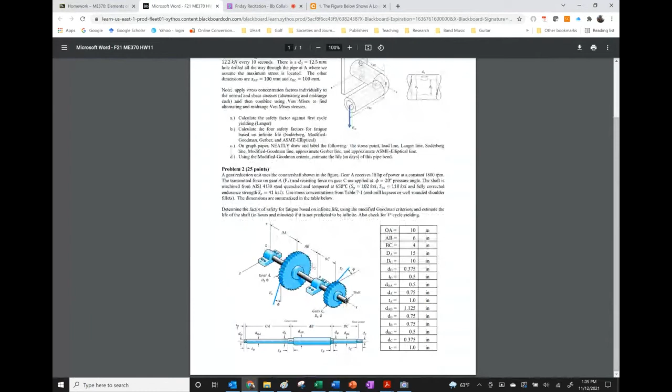Okay, so what is the homework? Is there anything specific about the homework problems? No, I think it's all just making sense. Just doing more is helpful. Okay, so we had a problem like this and a problem like this, so we could do examples like that if you'd like.

I'm going to talk about more things about the project in the next class, so I could try to invent a problem or problems similar to the homework if you'd like. Yeah, sure. Okay, so let's try that.

All right, we got some weird loaded thing here, and I tried to pick out one of the stress concentrations we haven't used yet. One of the issues we'll have when inventing a problem is trying to get it in the right zone where we'll be able to predict failure. But we'll just go ahead and pick out numbers.

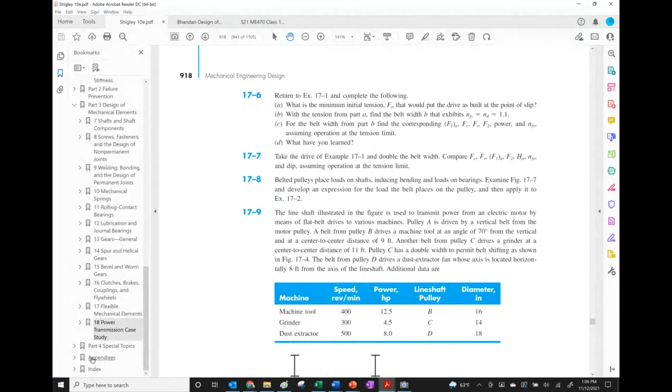So I think I have Shigley open right here. Oh, look at that, it did. And we'll start by going to some stress concentration things and work backwards maybe from there.

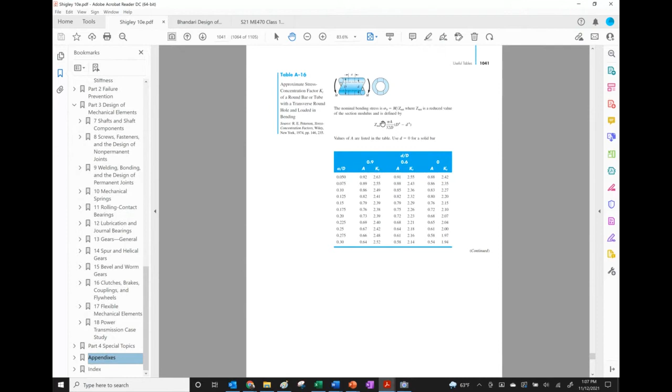So, yeah, this is for the homework problem. These are the stress concentration things that you would use, right? They're a little weird, so you have to kind of read through and see that they do this. They're weird compared to some of the other ones we've had here. But I don't think we've done where we drilled a hole through something, right? Have we used these before?

No, not through shafts. Okay, so let's do a problem where we do something with these. So that'll be our invented problem.

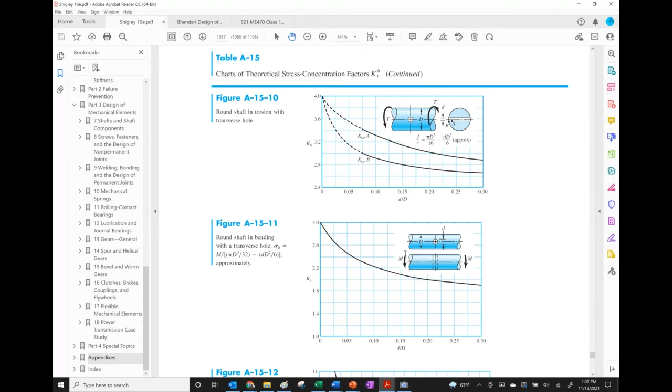So let me think. It's dangerous stuff, thinking. And I'll put this over to the side for the time being, and get to my camera and try to invent a problem.

All right, so just to keep it straightforward here, I think I actually had this as a homework once, or something like it. So maybe I should pick out an old homework problem here. I could do that, and then I would know I would get the right answer.

So I have crazy methods of saving things. I have homework summaries from other years. So this is homework 11, so I can kind of see what I've done in the past to try to keep track of them.

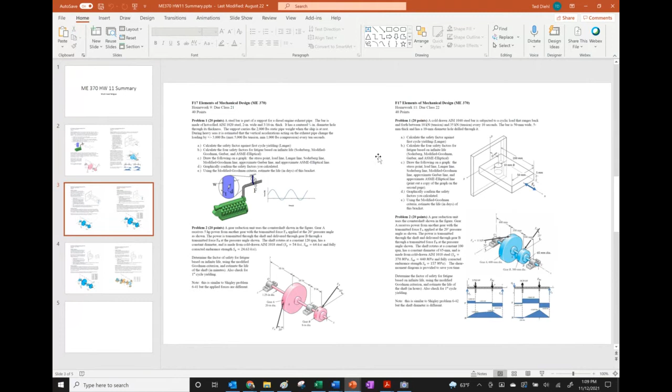So let's see, here's an old homework, here's from fall of 17. Oh, there were two separate ones. That's interesting, wonder why. No, there's homework 9 and then homework 11. Huh, I guess they're kind of similar. I don't know. Here you go.

From homework spring of 2019. So let's zoom in on that one.

So we have cold drawn 1045 steel, and the loads vary from 300 pounds up to 75 pounds down, right? And we have the diameter of this thing is 1 inch. I'm writing all this down as I talk about it, that's why I'm doing it here. Oh, and this happens every 10 seconds.

I need to write that word, every 10 seconds. And let's see, other parameters we're going to want to know here. Did I give the dimensions of this? Okay, yeah, okay, so 1 inch with a 0.25 inch hole drilled in it, and it's 6 inches long. Well, 6 inches to the point where it matters, right there. And that little hole has a diameter of 0.25 inch diameter.

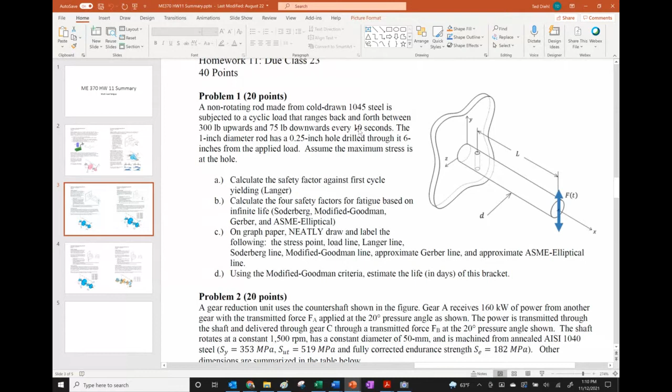Okay, and we want to find first cycle safety factor, and then the 4 safety factors, and then try to do all the other stuff. So this is pretty similar to problems we've done before.

Let me see, I said spring of 19, so I can peek at my solution. That's fair, right? I don't have to demonstrate my ability to think on the fly here all the time. You already did it, I'd say that's fair. There you go, all right, good.

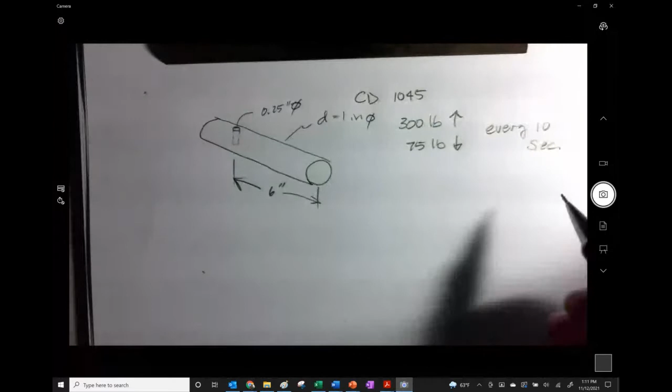So, first thing I probably want to do is figure out what the stresses are going to be. Yeah, I'm trying to figure out what the hell I just did here. That's a little weird.

All right, so I'll bring my stress concentration chart over here and look. You'll see that for the torsion - let's close this down so it makes it bigger.

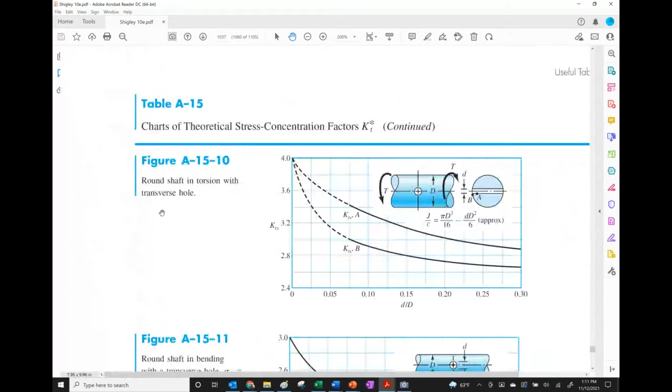For the torsion, they give us this J over C thing, and they give us two lines - one for A and one for B. If you look close up here, you can see B is just to the outside and A is apparently where this is going to be the maximum. But we really care about B because we're trying to find the worst case scenario - that's where the crack is going to initiate, right?

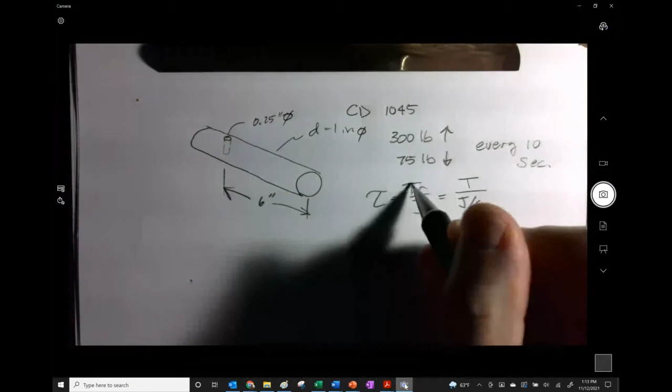So we're going to use the bottom one here of B, and that's dependent on just d over D, that's the only ratio that matters. We also need this J over C kind of idea. They don't quite explain that, but I don't know why they didn't write J over R instead, because that would make more sense - it's sort of the equivalent of TR over J. So instead we're just going to go T over J over C. The J over C is the thing we're going to get from that equation they pasted up here. So I'll write that J over C down as pi d cubed over 16 minus little d times d squared over 6.

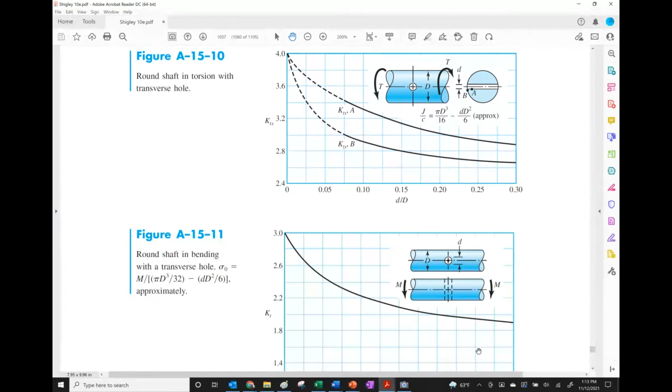Similarly, while we're here, we note that they give us a formula for the nominal stress for the bending. That's going to be sigma zero m over this large thing that is very similar to the one we just did for the torque, where it's pi capital D cubed over 32 minus little d times d squared over 6. So those are the first things I'm going to take care of - figure out this geometry.

So let's see, I'll do the bottom. Real quick, I'm looking at the figure A15-11.

And the moment goes with the direction of the slot. Is there another case for if it's perpendicular to the slot? It's a good question, but the thing is, that would put the hole on the neutral axis, so it wouldn't matter. Okay, gotcha - right, because there would be no stress if it was going the other way. It's a good question though, I thought the same thing, and then had to backtrack and go, oh yeah, that wouldn't matter because there's no stress on the neutral axis.

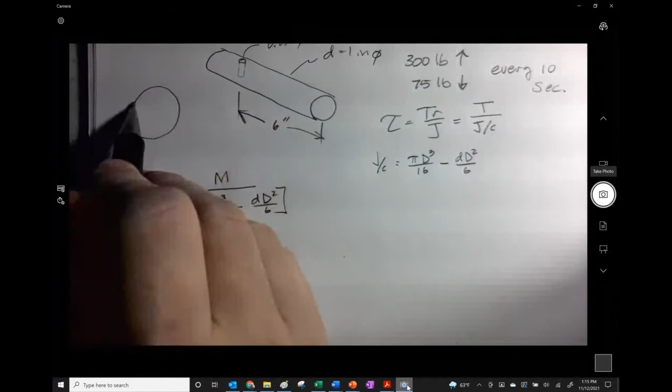Okay, so even if the little d is somewhat sizable, it still shouldn't matter? Well, it definitely would cause a stress-rising thing there, but I think mostly what we'd find is that the moment of inertia would just be reduced, right? The cross section would instead look like this right here, and that probably is what's going to cause the stress. There could be a stress riser right there, but the most amount of stress is most likely going to be right up to there. I don't know, Peterson probably has something like that in there - he really did a thorough job of coming up with just about every conceivable scenario for stress risers, and we're just getting a sampler of that.

Okay, thank you, no problem, thanks for asking. D cubed over 32 minus d D squared over 6, so that's just going to be pi, and the big D is 1, and the little d is 0.25 - that's right there, right? And 1 squared over 6. And we get 0.05651, and these are inches cubed.

Did I put a torsion on this thing? I can't remember, I didn't look at my original problem. No, it didn't - okay, so I didn't actually need all that. I don't know why I put that on there, never mind. I should have put some kind of torque onto this - that would make it a more interesting problem. But for the time being we're just going to have one fluctuating thing.

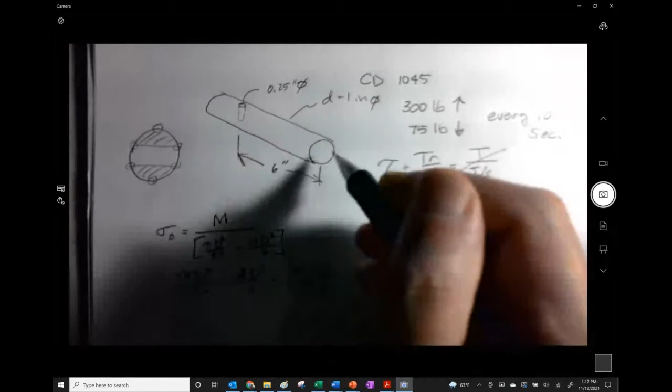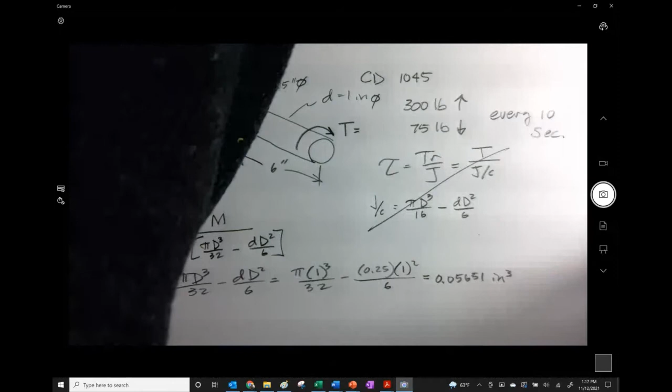Our homework problem would have a combination of stresses being placed on there - maybe I will do that here. I'm going to go ahead and do that, calling an audible. Let's put a constant torque on here. Let's see how much I could probably get away with on here. Boom, boom, boom, yeah I think we were okay. So I don't know, I'm going to arbitrarily pick - I'm going to go with 1,000 inch-pounds. I don't know what that'll do, so let me actually calculate this stuff.

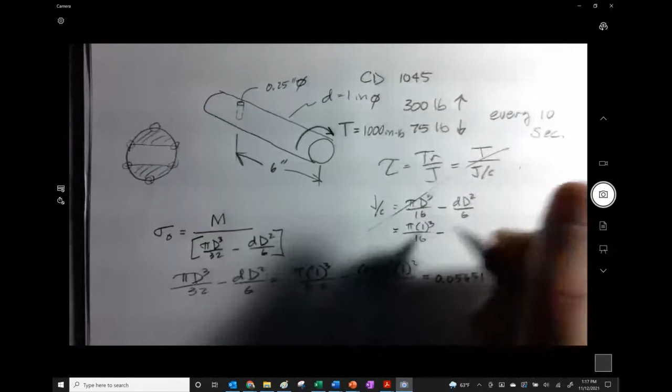I'm backing up and I got pi 1 cubed over 16 minus 0.25, and all of this looks pretty much the same right here, except for the 32 versus the 16, and 1 squared over 6. So let's see, we got ourselves - you can't even see it, right? Pi, oh no, pi divided by 16, because that's 1. That's good, and then just 0.25 divided by 6, and subtract. And so I get like 0.1547, right? Yeah, it shouldn't be too much - yeah, they're close to being one after the other.

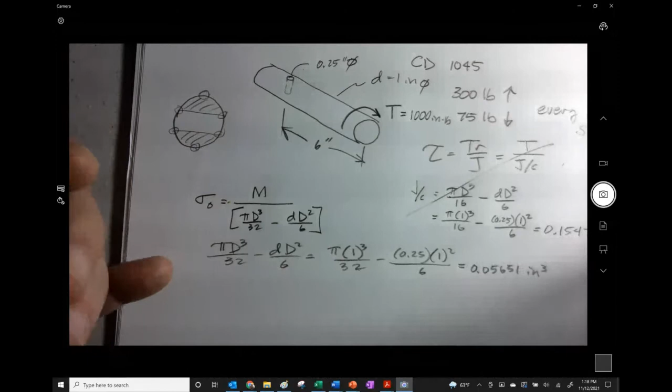Okay, so for my torsion I am going to get that torque of 1,000, right? It's not going to be a lot, is it? Well, okay, 0.1547.

All right, so it's not a lot, but 6.465 KSI. Now for this one, this is going to be steady, right? So it's nominal, and this is constant.

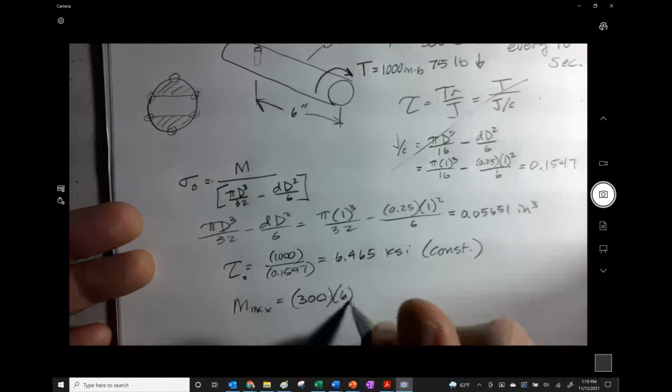My bending, on the other hand, is going to change, so it's going to alter. It's going to have a max bending equal to 300 times the 6, so we get 1,800 inch-pounds. And that's when it goes upward, meaning you're going to have compression up here, but tension on the bottom.

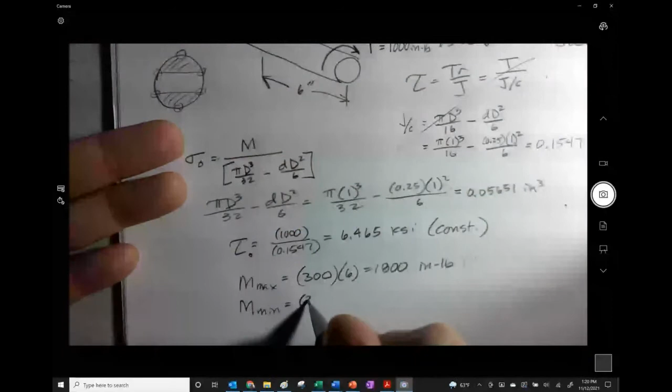For a given spot, we'd have tension on the top and compression on the bottom. But let's zoom in onto the bottom instead, because otherwise our minimum would be negative. So we're going to say this is the moment that causes tension. And then with 300 times our 6, that's going to give us 450 inch-pounds.

Something we should maybe do - I could turn the moments into a mid-range and an alternating, but I'm going to do it with the stress instead.

So I'm going to go with my nominal max, and it's going to be 1800 divided by my 0.05651, and I end up getting 31.85 KSI, and that's going to be in tension.

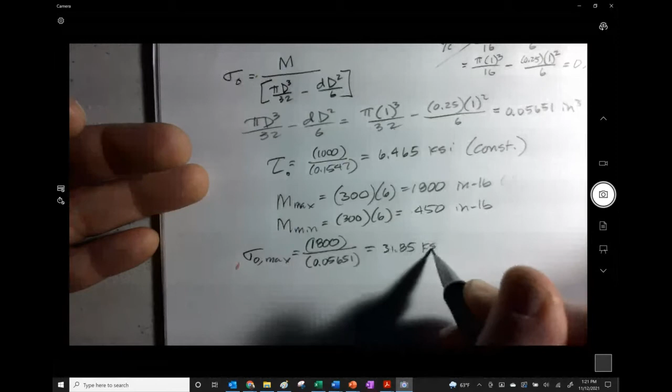And then I'll go with my min, so I'm going to get 450 divided by 0.05651, and I'm going to make that the compression one. So that's 7.963 KSI compression.

I can just move the camera, I don't have to move that. Okay, let's see, so my mid-range nominal is going to be this plus that over 2. But that's 7, that's negative. So I end up with 11.95 KSI.

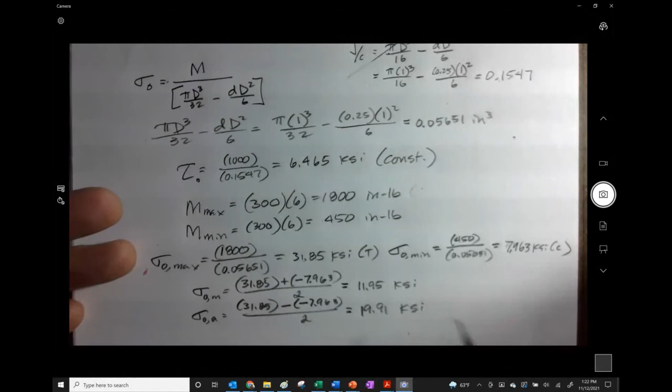And then I could have the same thing for my alternating: 31.85 minus 7.963 divided by 2. So I get an alternating of 19.91 KSI.

So this right here is going to combine with that right there when we go to get my overall mid-range and alternating, right? So the mid-range, I do the mid-range first. We're going to have mid-range here, going to be - I can do this in my head, I swear I can - KF mid-range here...

Squared plus 3 times K... Oh, I haven't looked these up yet, the KF stress concentrations. I meant to do that. All right, tau mid-range squared, square root.

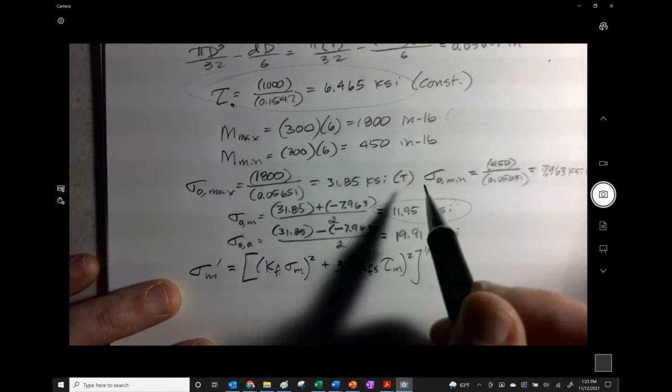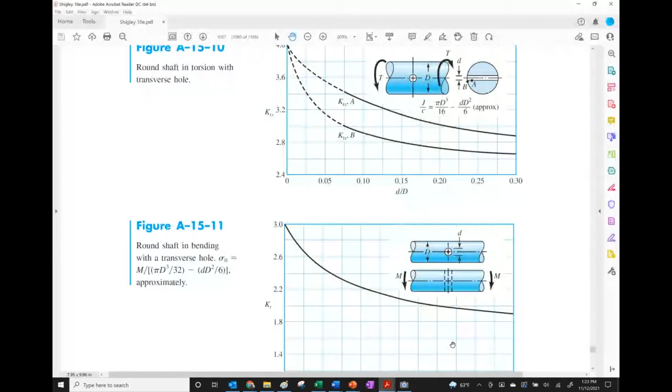Yeah, so let me look up my KFs, or KTs, I guess I'll start out with. And my mouse is hidden - there it goes, there we go. So, oh, I need my d over D. Well that's pretty easy because it's 0.25 divided by 1, so ta-da, not difficult to do.

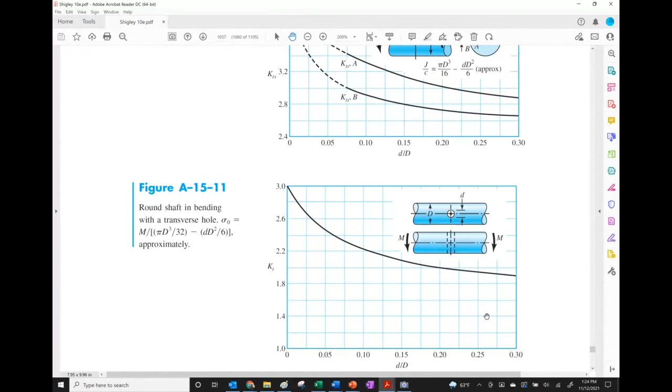And what I said this was before - well, now I've got to do this one first. All right, so that was just 0.25, and I said that was 1.93, which seems very ambitious right there. So I guess I'm going to write it underneath here. KT is approximately 1.93. While I'm here, and I haven't done this before because I just added this aspect onto the problem to try to make it more applicable to our homework.

We want 0.25. I'm going to say, okay, so we have 2.6 right here, so I'm going to say that's 2.7. It's actually probably just a little less than 2.7, I think, but 2.7 is good enough, right? So I'm going to go with my KTS approximately - did I just say 2.7? My attention span is so short sometimes. Yeah, 2.7. So that's going to actually increase this thing quite a bit.

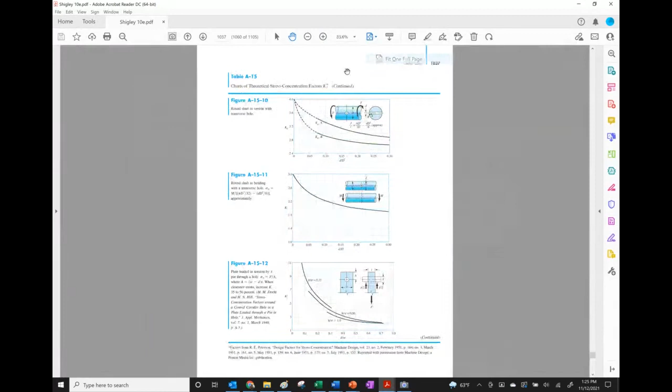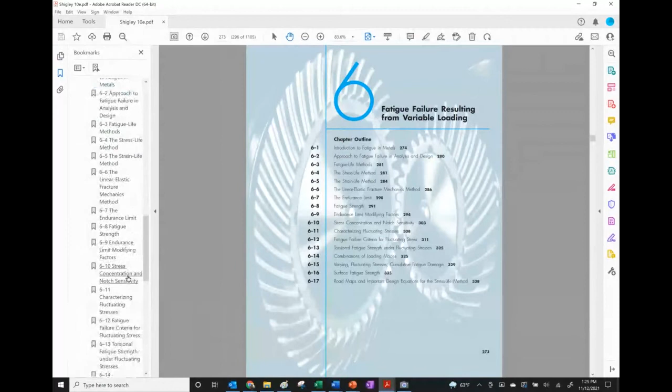And now I also need to go and find my Qs for my notch sensitivity. So let's see here, I'll open that up over here. Yeah, and we are in chapter 6, notch sensitivity. So okay, so our diameter of the notch is 0.25, so the radius is 0.125. So that's what we're going to use here.

We need some material properties though, don't we? We were told it was 1045 cold drawn. You could trust me that if I give you the numbers, they're the right ones - we don't necessarily have to flip to the book. So the yield strength for that is 77 KSI, and the ultimate strength is 91 KSI.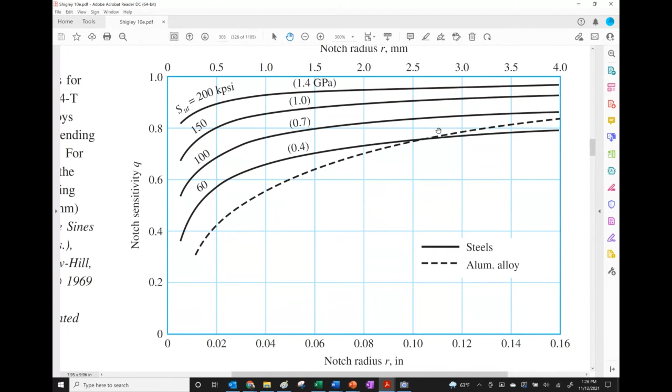But I'm not going to for this next one. We'll do this similar thing. And here's our 100 KSI. Yeah, that's actually pretty close to 0.9. No, I guess I'm going to go actually 0.85. Right, I'll go 0.85 on that one. It wasn't all that much different.

So I can get a KF of 1 plus 0.834 times our 1.93 minus 1 here, and 1.93 minus 1 times, I already have this one written out, so I don't know why I'm calculating. It's the other one I have to calculate. This one comes out to 1.777.

This is the one I have to calculate because I hadn't done it before. 1 plus 0.85 times our 2.7 minus 1. I don't know, too many things. Okay. 0.85 and 1.7 times that, and then add 1 to it. We get 2.445. All right.

So, coming back, okay, so that was a thought cloud because it was a diversion. We had to go back up to there. For our mid-range, we're going to get the KF of 1.777 times the mid-range, this guy, 11.95, and that gets inside the square, plus 3, and we go 2.445 times, where'd you go, this guy up here, right? So this was a nominal because of the twist I arbitrarily put onto the thing.

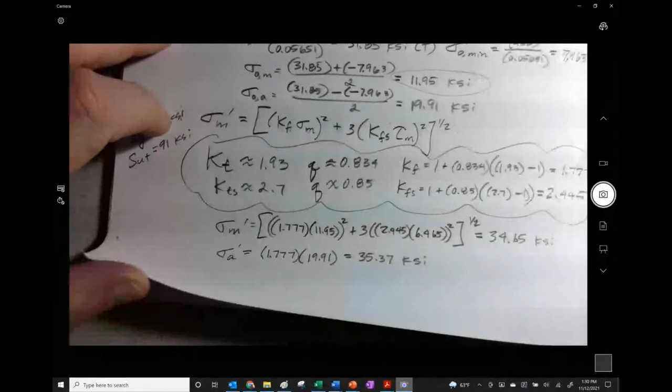So we have 1.777 times our 19.91, and we're left with 35.37 KSI. So here's our mid-range and our alternating, and we can start doing some stuff with the fatigue part of it now.

With this, we need to get the endurance strength. I'm going to fly through that part because we've already had a bit of practice doing it. It's just being careful that we pick out the right factors and coefficients. And I'm using the values from the 10th edition because I haven't updated them. So we find SE by taking KA, KB, KC, KD, KE, and KF and SE prime. And as I had mentioned, the ultimate was 91 KSI.

Why is... it doesn't want to come on, focus. There you go. Here's something to focus on. There you go. All right.

Okay, so here's just what the factors ended up being. 0.817 for the surface condition factor, which I believe I chose because it was cold drawn. I think that's the thing. A lot of times that's my go-to, the cold drawn and machined, because a lot of the stuff that we deal with is machined. So yeah, it's good. I don't know what the ground one is. I'd like to find out, but maybe someday I'll find out.

And then for this, it's not rotating and it's round. So I did get a DE for this, right? Where you take 0.37 and multiply it by the actual diameter, which is a weird thing. I just did something weird. I don't know. Anyway, and my solution, I'm looking at my old solution, which is a typed out, written out Word document solution, and I made a mistake there. I never caught it, but that's okay.

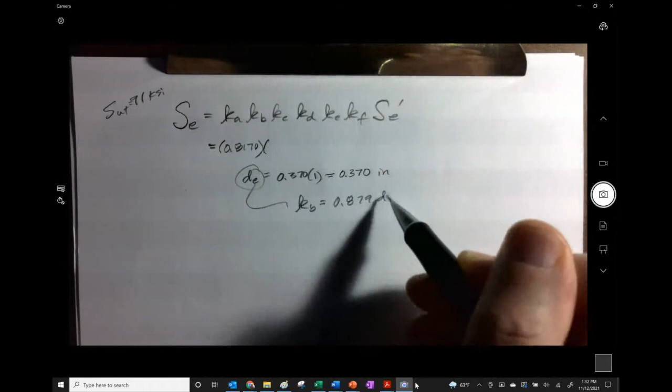So we use that and we stick it back into that KB thing where I think it's 0.879 times the diameter raised to the negative 0.107, right? So we use this diameter inside here and we end up getting 0.9777. I seem to have seen that one before, actually. I think it's my combination of stuff. I think it's with a 1-inch shaft diameter.

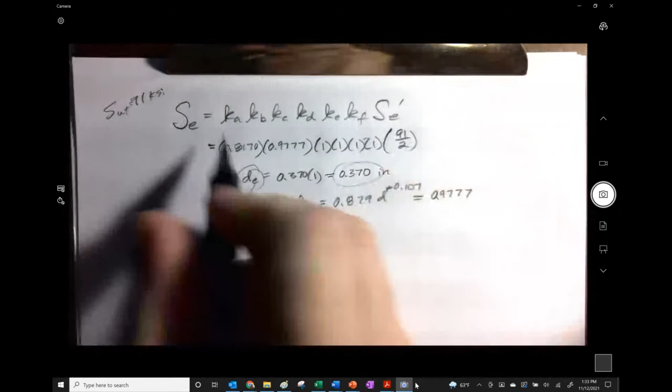That's what, but yeah, anyway, the C. This is a bending thing. It does have torsion in there, but it doesn't matter. So that's going to be 1 for there, and then the rest are 1s. Put another 1 in there for good measure. And then we have 91 divided by 2, right? That's the SE prime. And we're left with 36.34. I said 36 and I wrote 63.

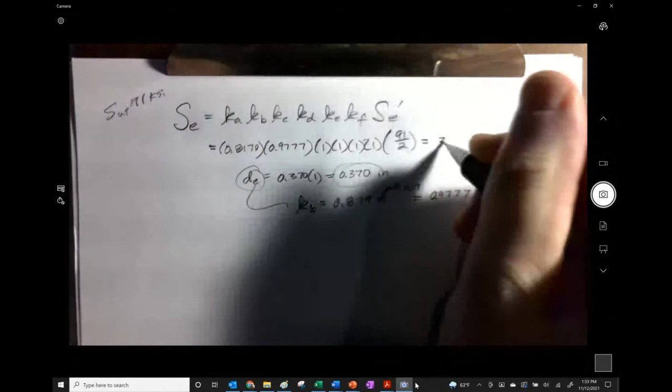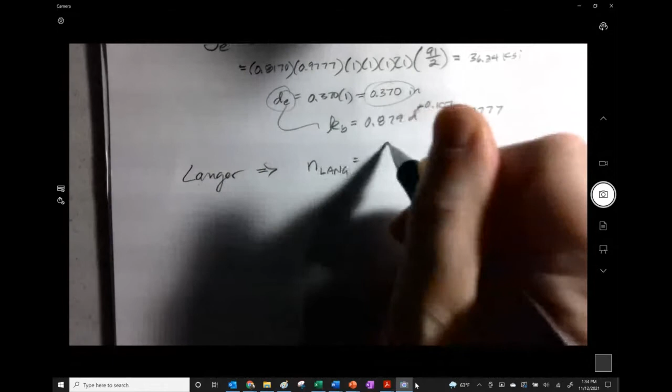All right, so now we have this SE, we're able to go through and get all of our factors. So our first one is the Langer.

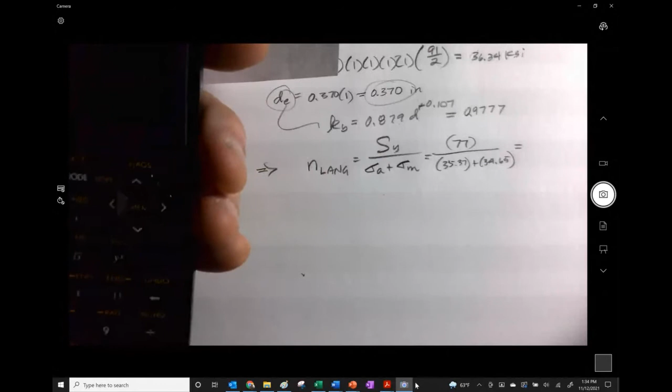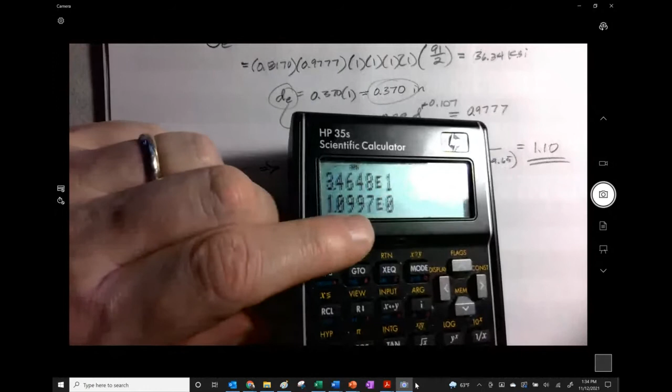Langer is the yield strength divided by sigma A plus sigma M. 77 was the yield, and I have 35.37, but now 34.65. I'm really close, but still okay. 77, 35.37, 34.65, plus divided, we're at 1.10, only 2 decimal places. It actually came out to 1.0997, but 1.10 — it's close, good enough.

Then we're going to go to Soderberg. That's 1 over sigma A divided by SE plus sigma M divided by SY. So 35.37 divided by 36.34 — so it was already pretty close with just the alternating one to being goners.

But now we're going to add in the contribution of the steady stress, and that's going to be divided by 77. So we go 35.37 divided by 36.34, and then we have 34.65 divided by 77. Add them together and take the inverse, and we get 0.70. So it's predicting failure.

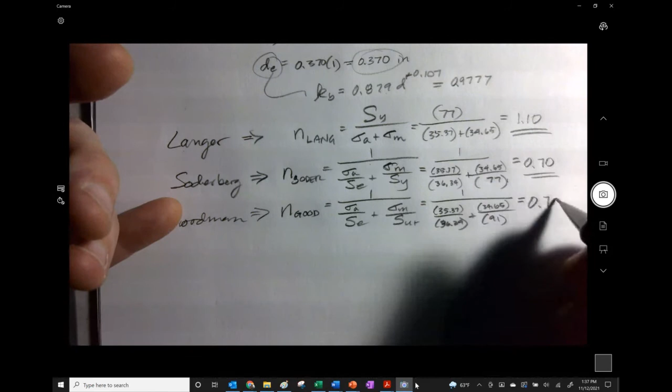So really 0.7385. Do I really want to do that? I'll do it, I'm not lazy. I'm not lazy, I'll just keep repeating that, so I'm not lazy, but I feel lazy. Don't feel like doing it, but I will do it anyway.

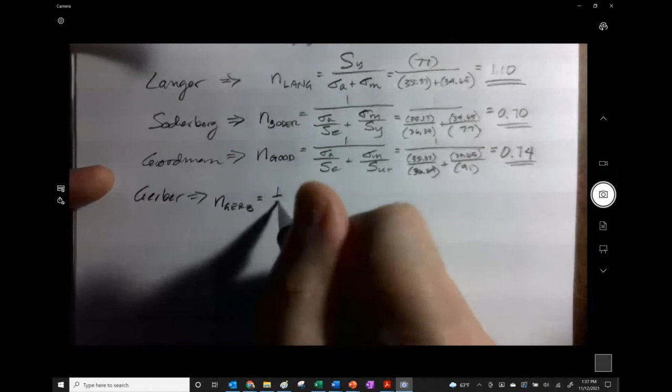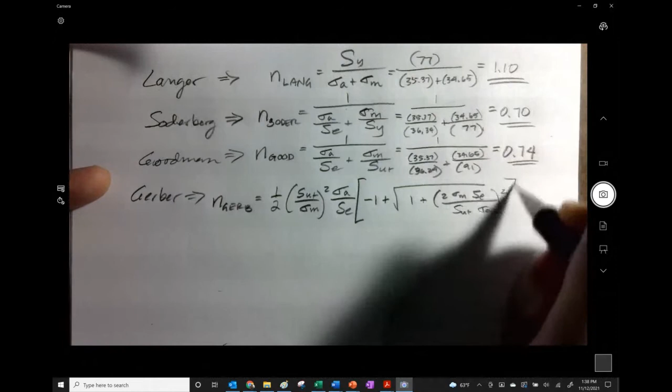Gerber. So this is a long one here. I don't want to write it out twice, I'll write it out. 1/2 the ultimate divided by the mid-range squared, the alternating divided by the SE, then -1... plus, I don't know why we didn't subtract 1 out the other side, that's all right. 1 plus 2 sigma M SE over SUT sigma A, all of that squared, close bracket.

My N looks like an H. So 1/2 and 91 divided by 34.65 squared. Sigma A is 35.37, and this is 36.34, minus 1 plus square root of 1 plus, and then 2 sigma M is 34.65. SE is 36.34, and ultimate is 91, and sigma A is 35.37. There's a lot of stuff to keep track of.

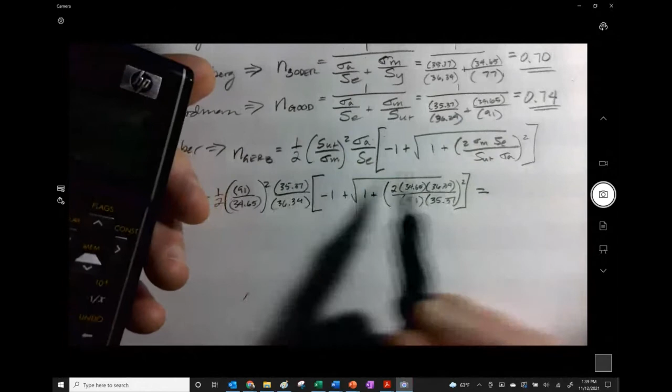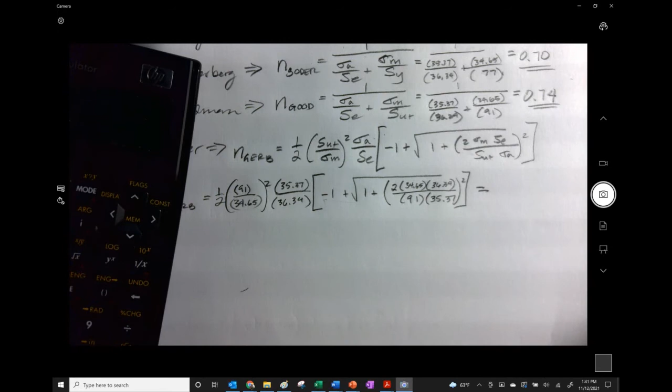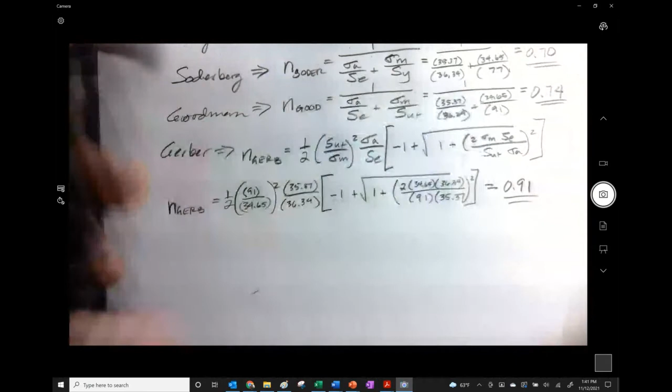Okay, so I got all that stuff on the inside while I was talking, 35.37. So I probably screwed it up. 36.34 divided, and now we're going to have 91 over 34.65. Divide it and square it and multiply it and divide by 2. And I get 0.91, 0.9053. Like I said, I probably screwed it up, but it kind of makes sense the way it is.

We could take a look at it here in a second. And then let's see, we have the ASME, which is considerably easier than the Gerber one. But I'm only going to make you calculate the Gerber one once for this homework and then never again — it would just be a mean thing to do on an exam because it takes a lot of time. So this is sigma A over SE squared plus sigma M over the yield strength right here. I don't know if anyone at the ASME uses this particular thing, but it's named after them. Must be a reason for it.

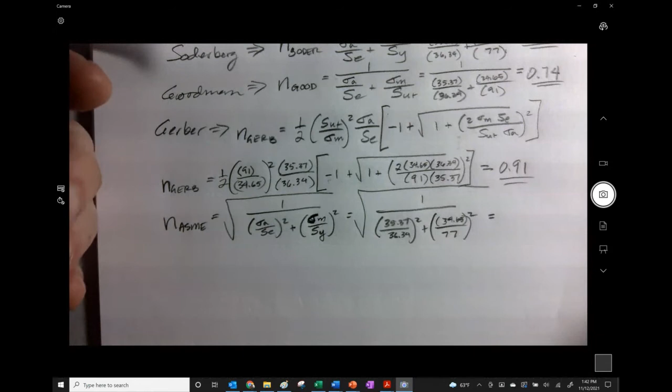So we have our alternating is 35.37, and our endurance strength was 36.34, squared, and sigma M is the new one here, 34.65, because we modified the problem, and that's divided by 77. All right, so let's see — 35.37, 36.34, square them, then 34.65, I really need to write a little neater. And then square them. Okay, so I screwed something up over here, I don't know what happened. All right, so I've got to start again.

35.37. This makes for great video, doesn't it?

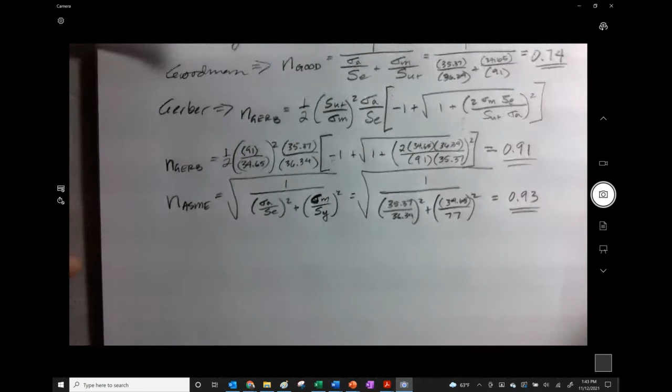36.34 divided and squared. Okay, then 34.65, 77 divided and squared. Add the two, flip them, square root them. 0.93. And that makes sense, I guess, especially looking at the older problem. I had a 0.97 here and a 0.99 for there. So I got pretty close, so I think I got probably the math right.

So now let's do the life prediction thing first. We want to get the equivalent completely reversed stress based on Goodman. So we use the alternating divided by 1 minus the mid-range over the ultimate.

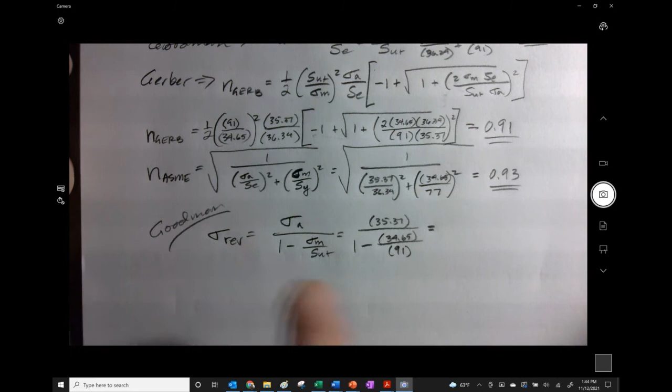From that, we will get the alternating is 35.37. 1 minus the mid-range is 34.65 over the ultimate, which is 91. So here I start at the bottom: 34.65, 91 divided, 1 minus - but it should be minus, okay - and then we're just going to divide 35.37. And I have 57. Well, that's pretty large. 57.12 KSI.

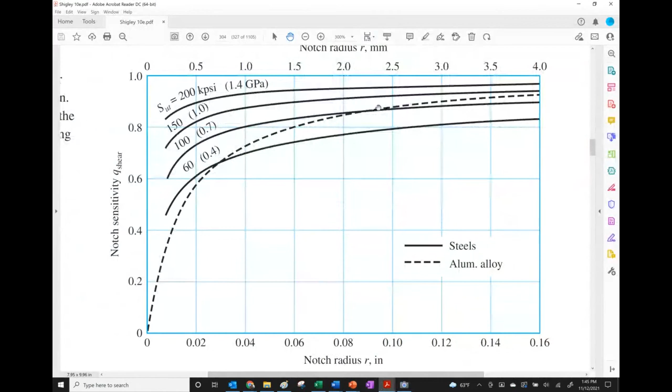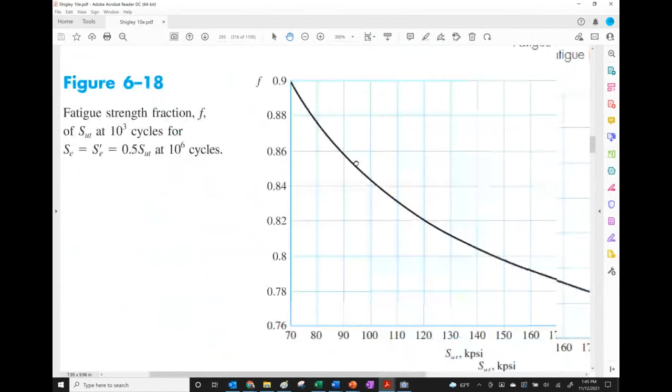And then we need to do the thing where we get the F, right? So we estimate our F. It's at 91. We get that from figure 6-18, at least in the old book, the 10th edition. And they even have an equation for it now in the 11th edition, which is nice, and they added the top of this with megapascals, which is nice. But for 91, it looks to be - I have it as 0.856, so I'll buy that. I did mine from a curve fit equation I made of my own.

0.856. And then from that we get the A. I won't throw the numbers in there, but just as a reminder, this is the form of this. But if we do that, we get 167.1, and for B, we get negative 1/3 log of FSUT over SE, and from that we get negative 0.1104.

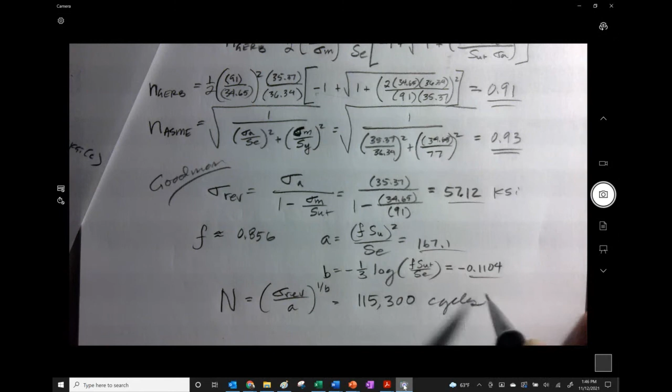So our estimate N for this thing is that reversed stress divided by A, raised to the 1 over B. Throw those numbers in there, and we end up getting 115,300 cycles. And I'm not reporting that yet, so I'm keeping 4 sig figs for the time being.

But if I want to estimate the time - oh, by the way, no, that's not true. I actually don't get that value because I have a different thing. I should check it out. I had this stress now, so I need to put that back in there.

All right, so let's see. I have my 57.12, and now divide by 167.1. Divide, and then take 0.1104, but take the inverse of it and then raise one to the other, and I've dropped down to 16,700 cycles, and they happen every 10 seconds.

So what you would do is you would go - you just have to kind of do a little units thing where you go cycles divided by... well, I decided to go like, okay, if I have 10-second cycles, then I have 6 cycles per minute, right? Just divide 60 by the 10, and now I got cycles per minute. And so I could go 6, and then cycles per minute would give me the number of minutes, but I would rather go 60 minutes per hour, and that gives me the number of hours, maybe, I don't know. So divide that by 6 and by 60, and now I have 46.4 hours.

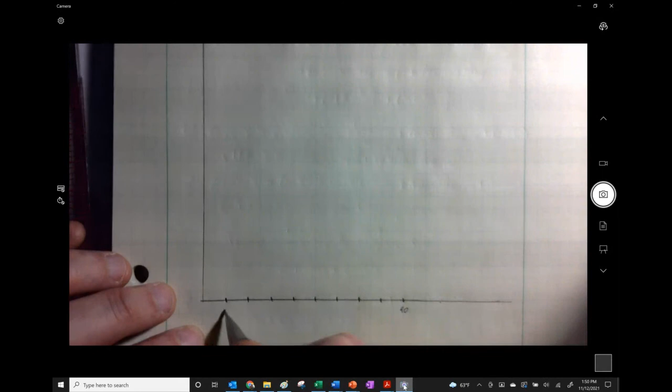So let's see, I want to break that into sensible things here. So I need 91. I actually kind of need like 10, right? So what if I would go to 10, go there - 10, 20, 30, 40, 50, 60, 70, 80, 90. It's not really using my thing up as much. I think I could get more usage out of it? I'm gonna stick with this. Okay, so here's gonna be my 90, right? So I'll label them.

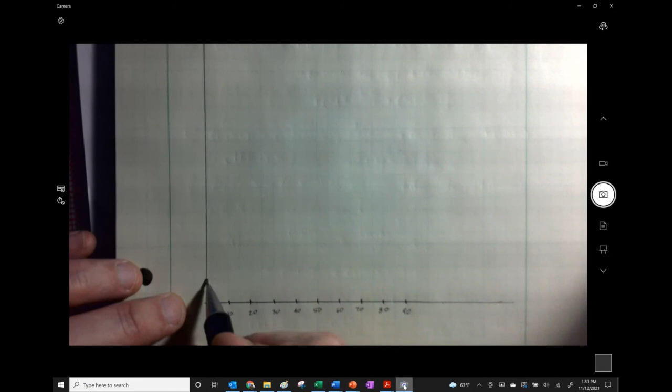My old machine design professor really emphasized picking the proportions of a graph to use them correctly. I haven't really pushed that hard, and I don't know where that skill set would come from.

So anyway, this is going to be sigma m, and this is sigma a. It's sort of a lost art because we graph so much stuff in Excel now, so we don't have to think about how to maximize page space.

So we're setting this up here. We have 77 as the yield, so that's somewhere up there. For the endurance strength, we got 36, so that's not really very high right there. For our yield, we got yield down here. Do I want yield? Yeah, I want yield here. And here we have our ultimate.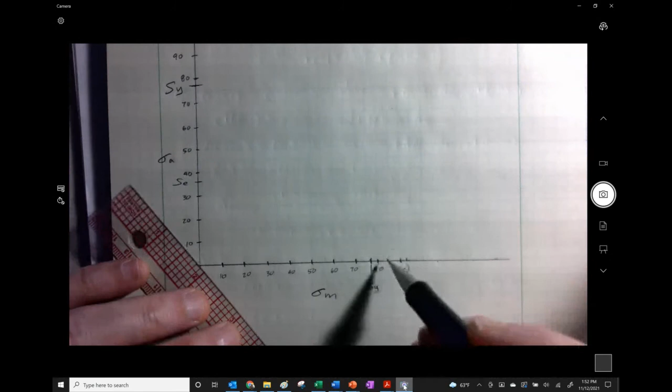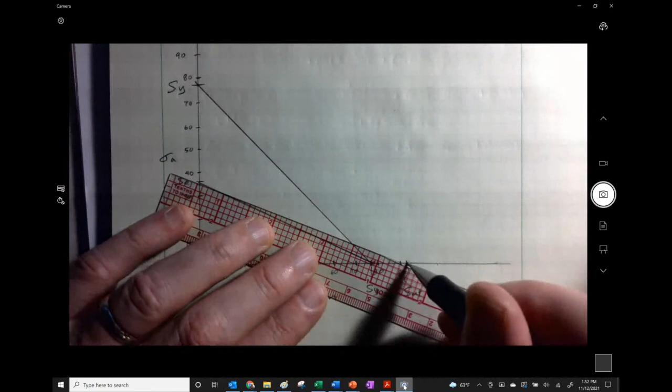I'll start out with my Langer, which should be 45 degrees. Then I'll go to my Soderberg, which should be from here to here, from the yield strength to the endurance strength. Then my Goodman, which should be from the ultimate to the endurance. And I'll label them Langer, Goodman. I don't know a good place to.

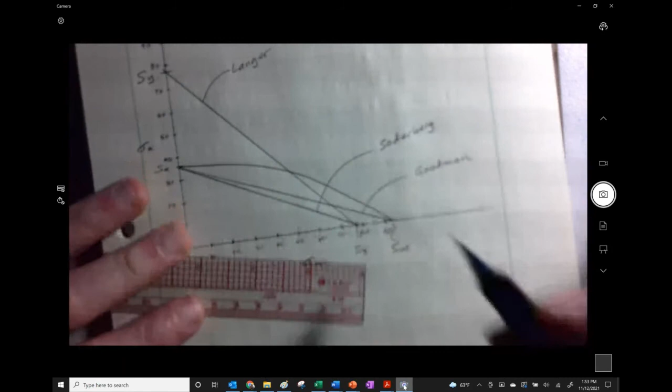There we go. Now I'm going to be a little bit artsy and try to draw as best I can. It's not going to be perfect, but what the hell. That's going to be my Gerber, like the Gerber baby, Gerber baby food.

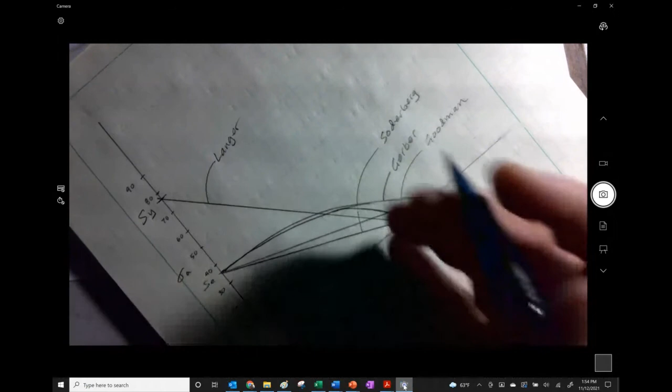And then the last one is this ASME elliptic, and this is a hard one to do really well. I didn't do a great job, I panicked and I bailed. Let's see, like that, right? Just like the name implies, it's supposed to be an ellipse, so it has more of a steeper descent to look more elliptical as it gets down to there. But it's an experience. The ASME one right there.

Okay, let's plot out our point, and our point is going to be pretty much 35 and 35, right? Because we had 34.65 and 35, so 35 and 35. That's an easy one to do.

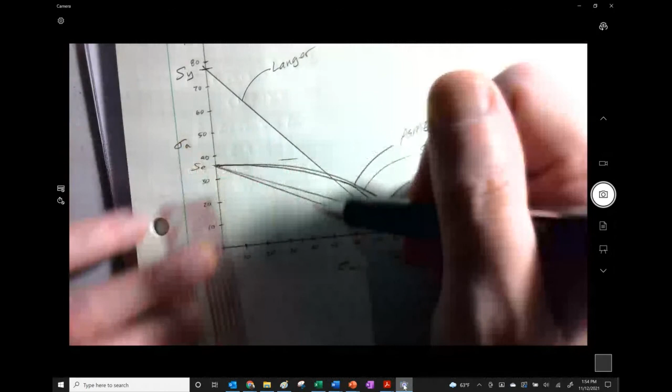Kind of trying to find where I can. I guess I'll make a straight line over there, somewhere in there, and somewhere in here. Okay, so here is our load line, from 0 up, boom. And you can see where we cross all of these.

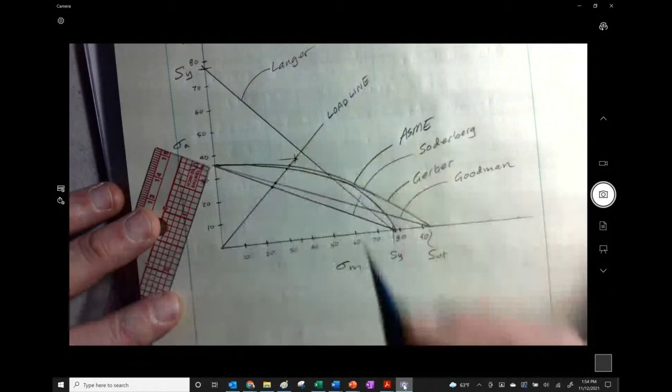It looks actually a little more severe than I would think it was. That looks actually pretty far away from here. I don't think I asked for this, but I do want to, just out of curiosity, see what these ratios are.

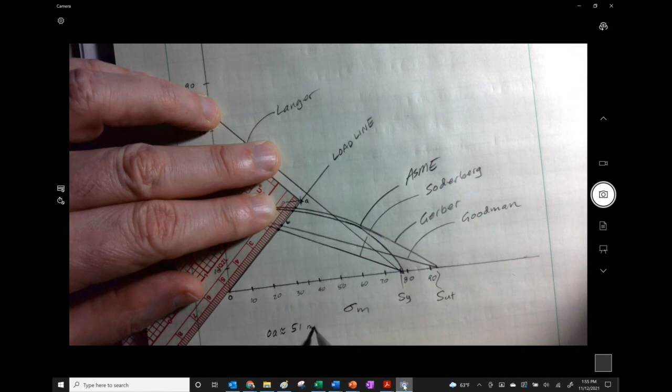Let's just go to the Goodman. I'll just do the check of the Goodman. This line over to our point right here, and I'll call that O, and I'll call that A, and I'll call that B, just this time. So I got OA is approximately 51. And then to here, OB is approximately, I don't know, like 37.

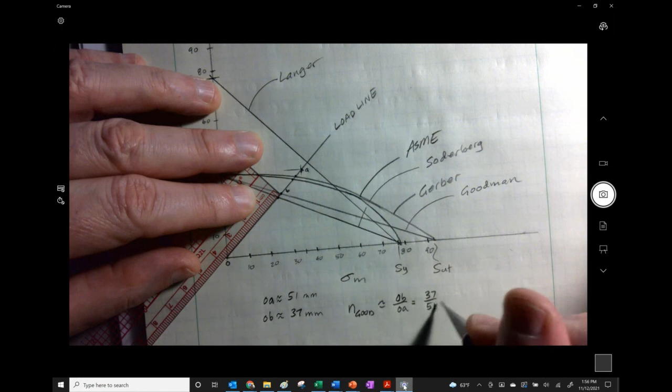So the graphical estimate here would be OB over OA, right? Because it would be 37 over 51. All right, got 0.73. So I guess it does match up, right? Because we got 0.74 right here, so as bad a job as I might have done.

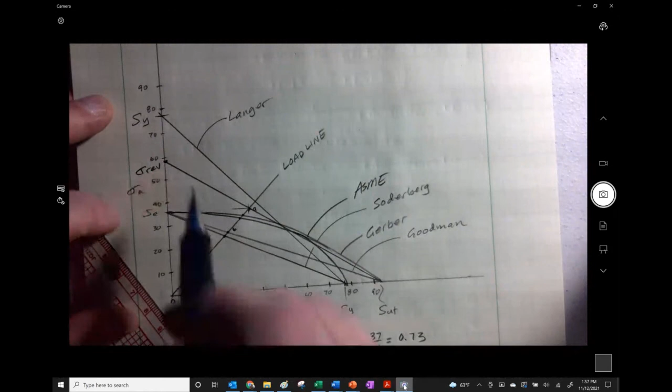And then the last one, so let's just confirm this right here. We want to see this going through this point from the ultimate, through the load point, and we see the intersection here. So that right there is what we're graphically estimating as the equivalently completely reversed stress. What value did we get? We said we had 57. Okay, I'll buy that, that's close. This is a thick pencil, right? It wore off the label, but it's a 0.9 pencil.

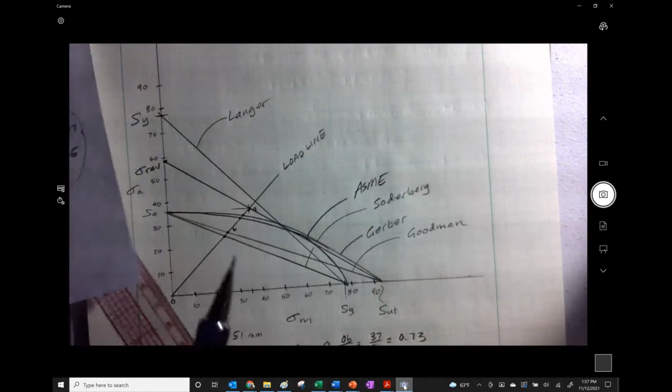All right, so there you go. There's an example similar to our homework problem, but there are other challenges in that one because it's a weird stress concentration factor. Does that make sense, Chris?

You still there? Yeah, everything makes sense.

Okay. Yeah, and I don't think this is terribly conceptually challenging, but just to become familiar with it, you need to go through a problem, and then you organize it, and it becomes kind of a routine. It is very cookbooky.

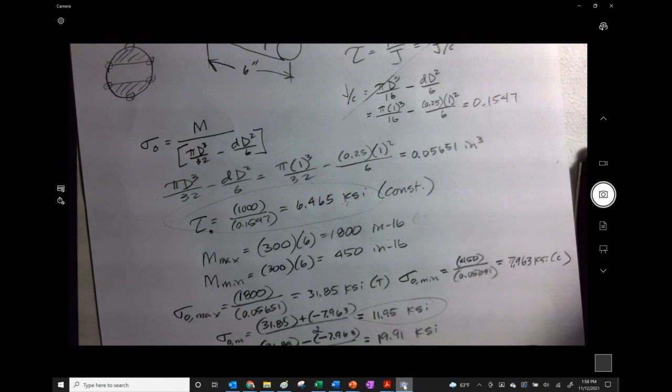All right, so let's see, we'll close this thing down. Is it still recording? Is it still recording? It is.